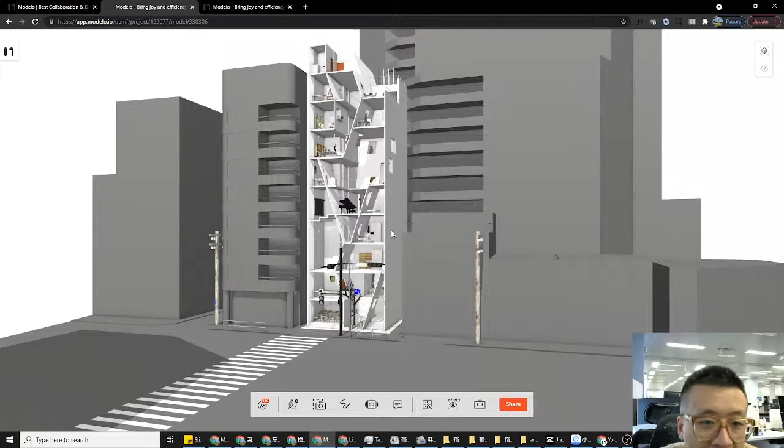I'm pretty excited that after a long period of integration with the current parent company of Modelo, that we can start to ship new features, and especially features requested by our users and clients, and it's very exciting. And I think today we're gonna go through a couple new features.

One of them is the first person roaming, or say the walk mode, that we recently introduced upon the walkthrough feature that we had before. Secondly, I'm gonna explain a little bit about the restructure of the previous comment feature, now called 3D note, and the new feature next to it, which is now called comment, and they are aimed for very different purposes for your practice workflow.

I don't know if you're a new Modelo user or you have used Modelo before, but Modelo's website is modelo.io, so you can just type in the address and click on login or sign up, and then you should be able to see an interface like this, where you house all of your projects and upload models.

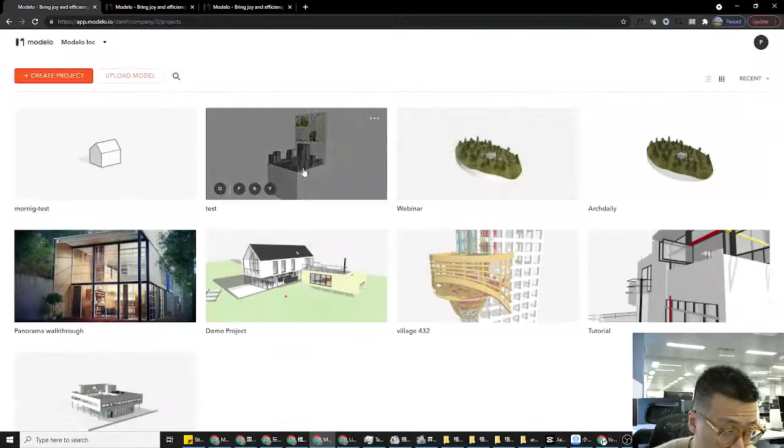We actually made some adjustments and optimizations here that allow you to directly upload a model on this page to one of your projects. Today we have a specific project called webinar here. If we go in, I can see 3 models are here that we have uploaded previously.

We're gonna go with this model right here, and let's check it out. Click on 3D, and now we are in what we call the 3D viewer page. It's probably one of the most popular pages of Modelo, where you can actually do lots of things. We have this toolbar right here.

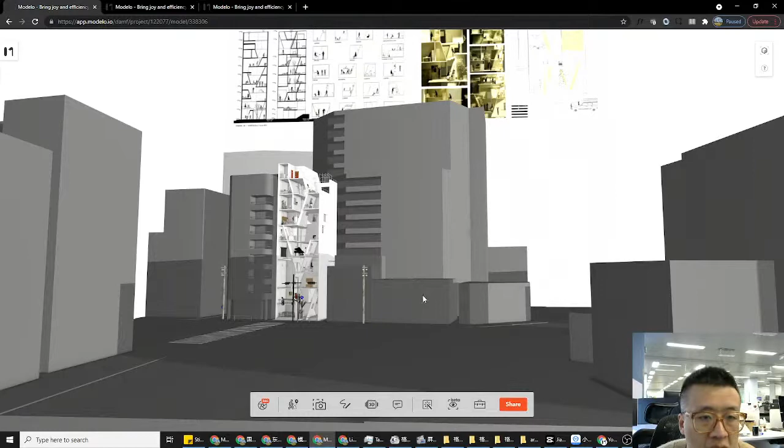The one on the left is what we call Auto 360, which means that you can actually render 3D panoramas and then automatically connect them together, so that you can turn a huge 3D model here in Modelo into a mobile-friendly 360 tour, which is very easy to share with your client and colleagues, and it's very mobile compatible, so you don't need to worry about a giant model crashing your mobile phone. So that's that. It's a pretty easy, intuitive feature.

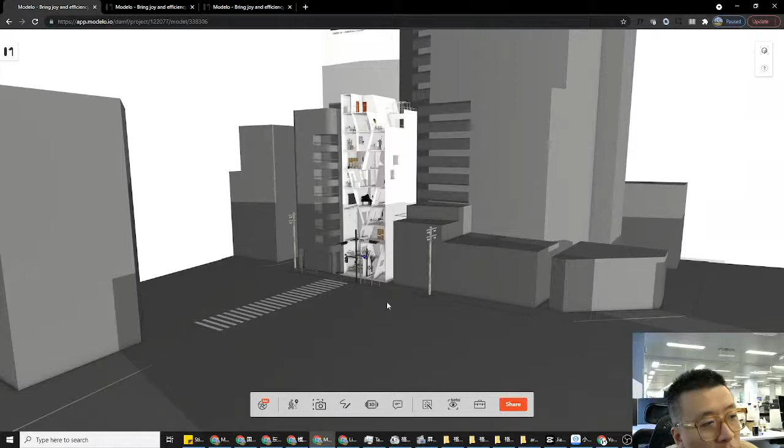Secondly is one of the features that I'm gonna introduce today, what we call first person roaming. It's somewhat similar to the experience of our walkthrough, but it's different. This time, if you click on it, your cursor turns into a people avatar, and then now you can place the avatar on any flat plane of your model.

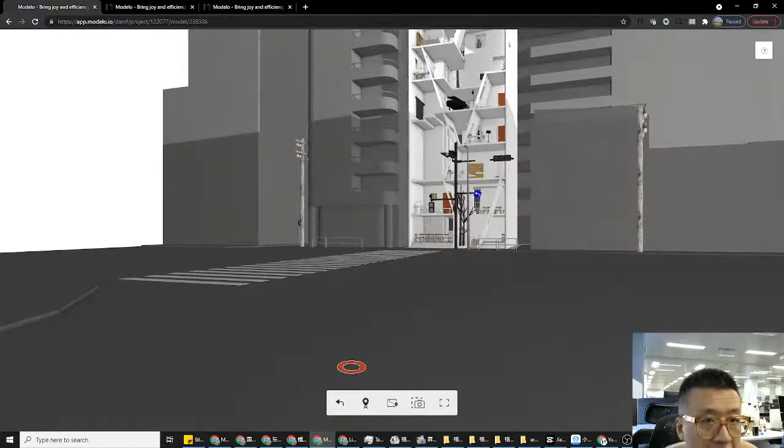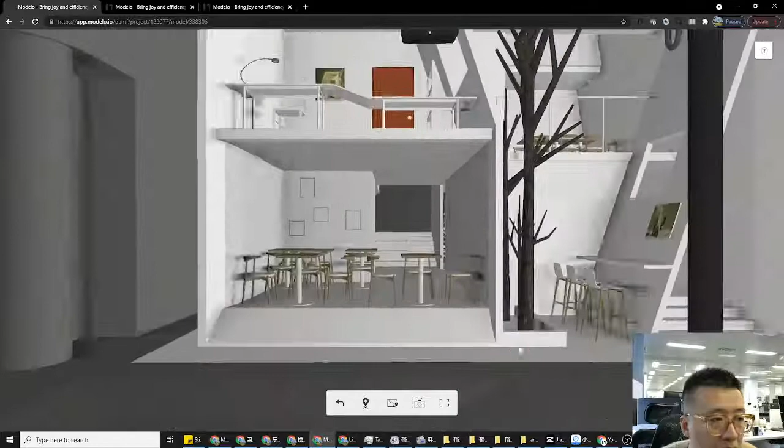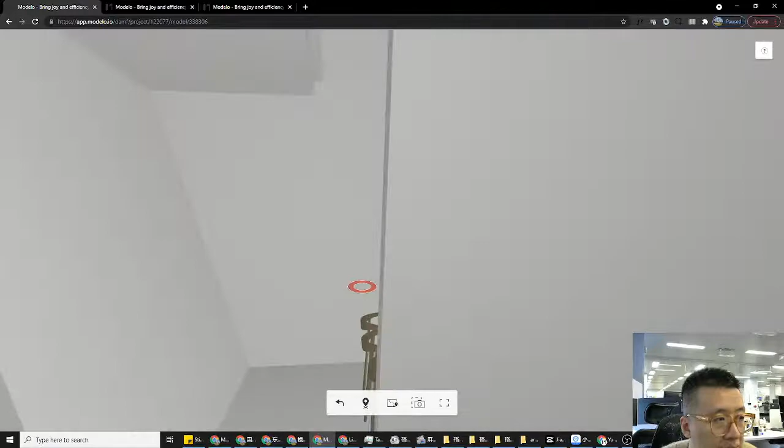If I click right here, my view actually lands where I just clicked, right? And then further on, you can use the cursor to travel through the model like this, which is pretty intuitive. You can basically just walk through your model by clicking the mouse, and you can also walk in the model so you can click on different levels. You can also climb stairs like that, and then you can just browse through the spatial design of the model.

This design right here is pretty complicated inside the circulation, right? So I just use this function to climb to this cafeteria area from the outside. Somehow I don't know how to get out of this space, but let's see. Go here, we can just click on it.

Now we are on the other side here. I think now we find the alley that leads us to the outside of the building.

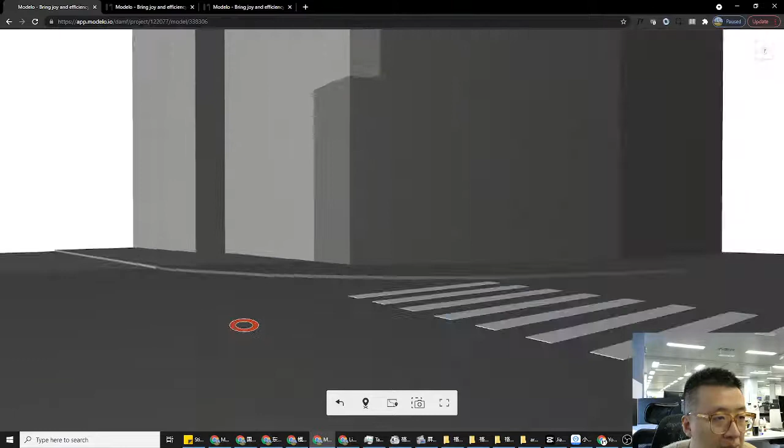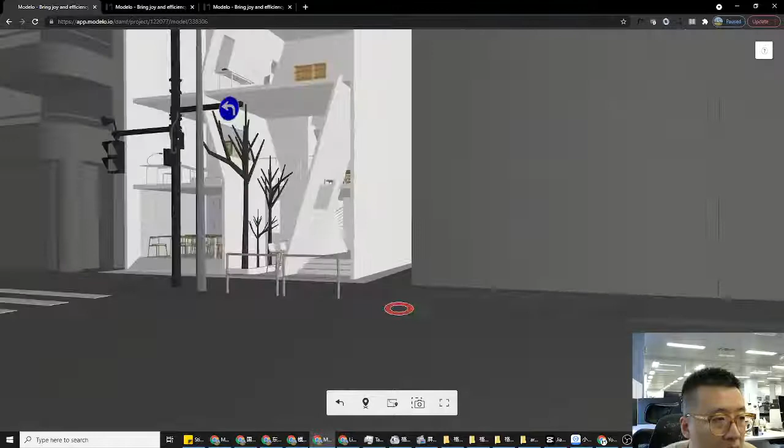This function here is very much simulating the walking experience, or teleporting experience. By clicking on different locations of the model, you will be able to walk through or teleport through the design.

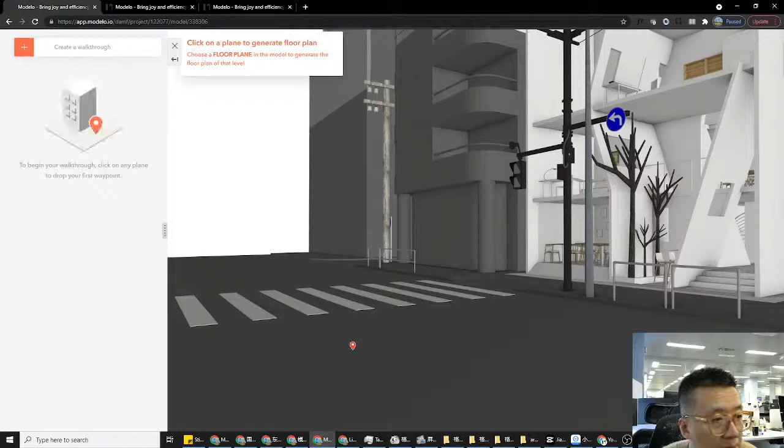On top of that, you can start or initiate a walkthrough directly in this walk mode. If you click on it, it's going to ask you to put a waypoint here, like previously, and then a second one and a third one. Then you can play it and adjust the speed, and now you have a path over there.

This path is very shareable, so you can share the model along with the path so that the viewers of your model have a more curated experience of your design. In a way, you're more in control by using this feature.

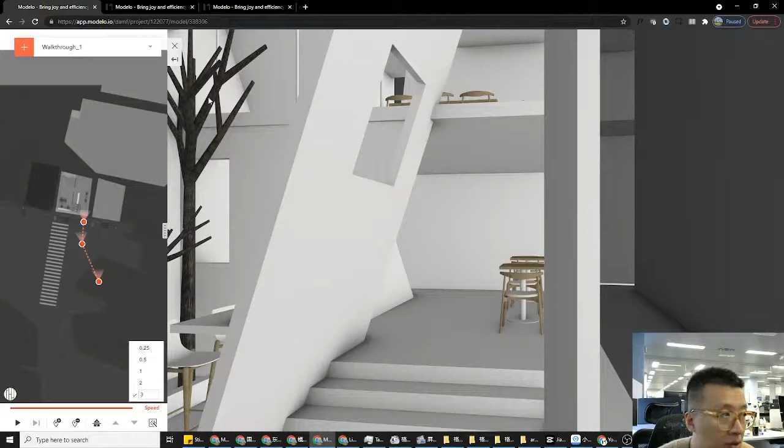But also, when you share the model, you can turn on the first-person roaming mode. Let's try this share right here. We now have this share setting function that allows you to manipulate different configurations of your share link.

For example, you can choose to show the walk mode, that's the one I just showed, or you can also show the walkthrough, not the walk mode.

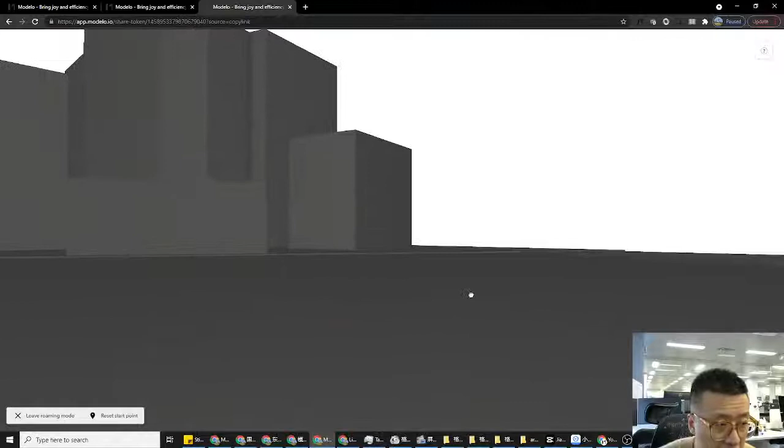We can see I have one of the share links opened here, and you can see that if I turn on the walk mode, the viewers or your clients will be able to walk through the design like that, teleporting through the design.

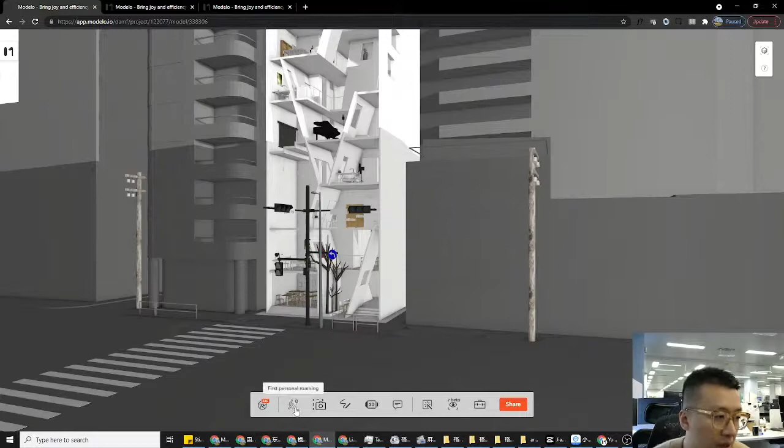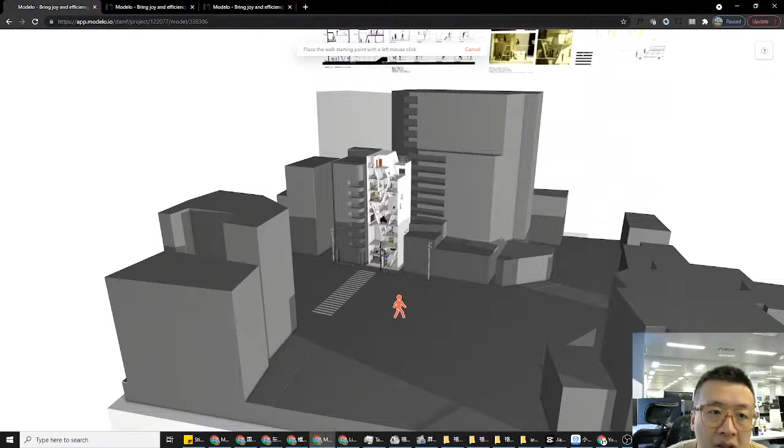That's one of the features which is pretty new, and I think we have learned from many other great softwares, especially the currently very popular VR capture software. They have this feature, and we think that for all 3D creators, like architects and designers, this feature really helps us better understand our design, as well as help others better understand the spatial quality of our design.

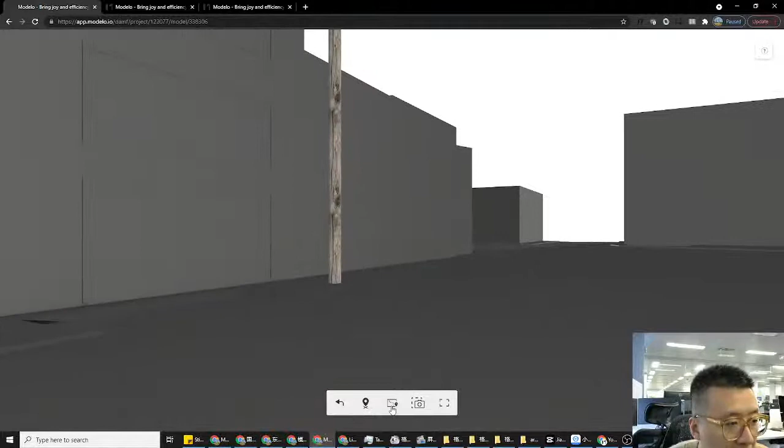So that's that. The first feature here you can just call walk mode — you can walk through the design like that. On top of that, you can create a curated path for your viewers to view, which is more controllable. That's the first feature I'm introducing today.

The second one is very exciting. Modelo was founded because we want to introduce a new way for 3D designers, architects, and engineers to better collaborate around 3D models.

I think we have done a pretty good job converting giant 3D models, Revit models, SketchUp models into a web link. On top of that, we created this very popular function, which was previously called comments.

Now it's called 3D slides, and it was designed for collaboration. But later on, we found that many people use it for presentation purposes, and now we rethink about it.

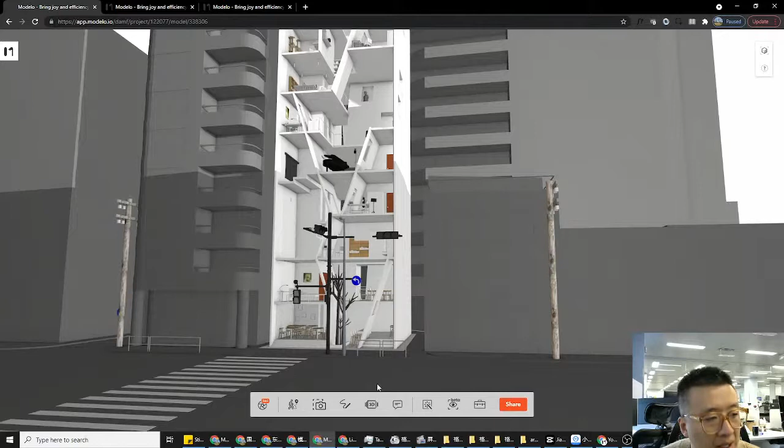We talked with lots of our users and clients, and found that they really have two different purposes when dealing with these 3D views or 3D annotations. So instead of one commenting feature that's actually most of the time used for presentation purposes, we divided it into two features right here.

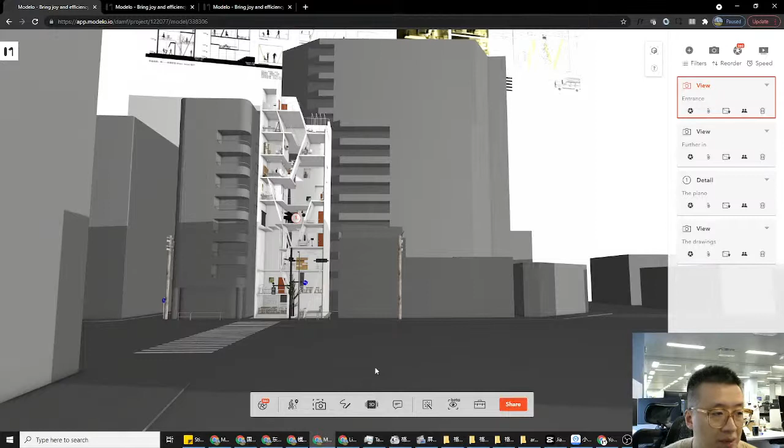The one which was previously called comments is now called 3D slides. By looking at the name, it is very much specifically only for presentation purposes.

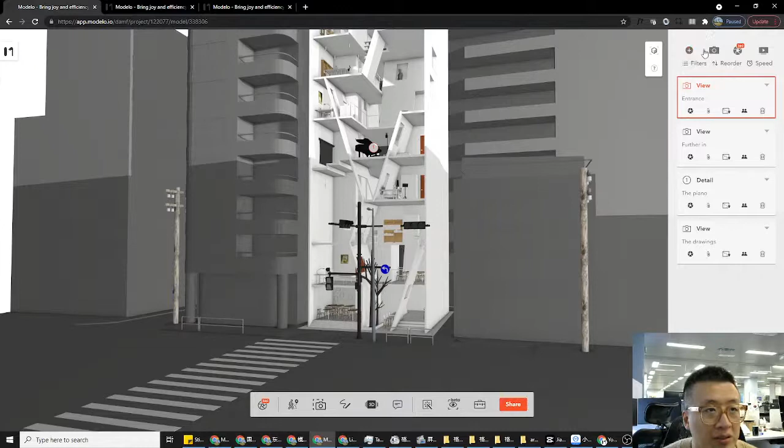The way you use it, you basically can add slides or add an annotation. If you're a SketchUp user or a Rhino user, you know you can add views over there — it's very much like that. You basically just add a view, add the slide, type in the text, give it a title, and then save it. Once you save it, it actually saves the camera location.

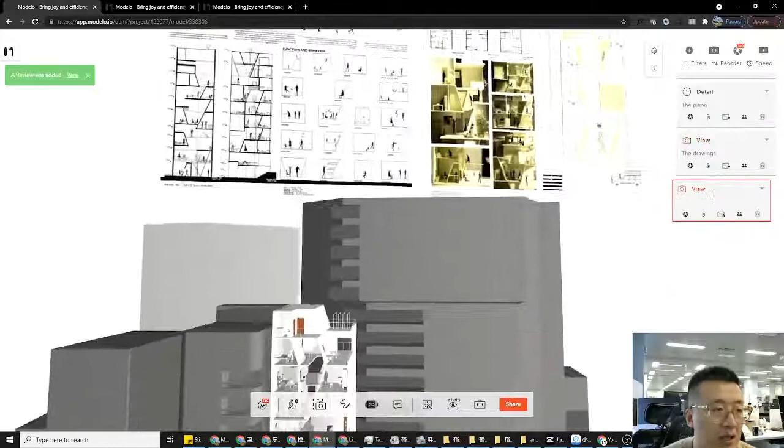You also save the current rendering settings. You can attach walkthroughs on it. You can attach attachments, images, and videos and stuff like that.

And then you can also turn it on and off for client ready, so that you will be in control when you share the design to your clients. You can only let your client see it from the very specific comment, right?

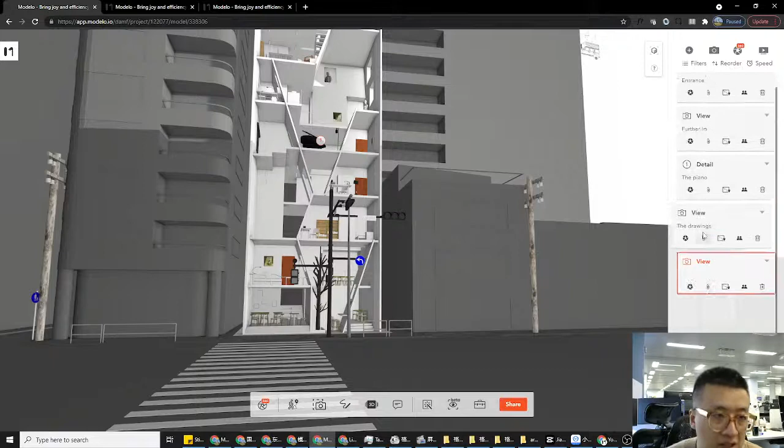The slide—I'm sorry, now it's called slide—and now we have four of them right here. And then you can do a presentation with this. So turn into presentation mode, it looks something like this.

So for our Modelo users, I think you're pretty familiar with this concept, and the only difference here is right now it's called 3D slides instead of comments. So that's for 3D slides, and now we have the very new feature, which we call comments.

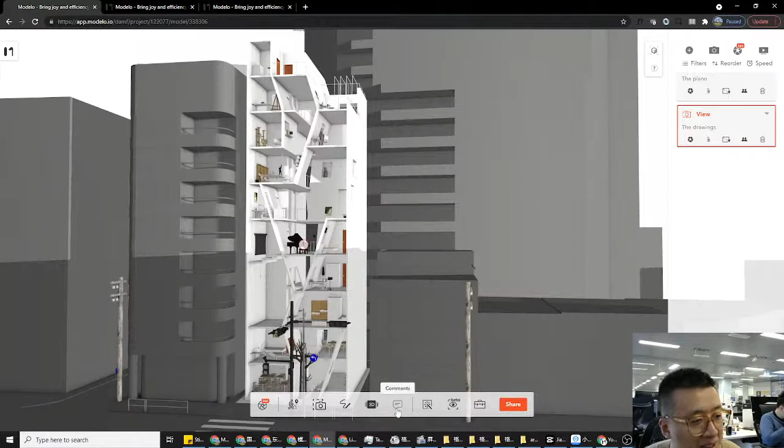The reason we thought about it for quite some time is because previously the 3D slides were called comments, and now we have the comments right here, which is only for collaboration purposes, only for commenting on the model. We also separated the markup functions and all the chat functions here as well.

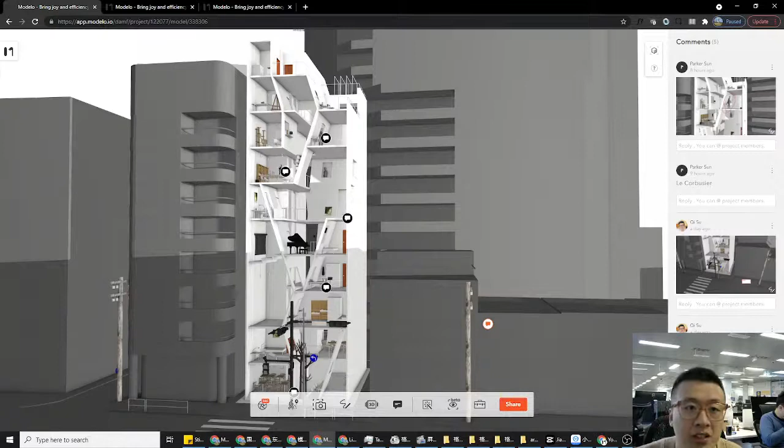So now with this new comments feature, it's actually synchronizing in real time. So if you or some other viewers are seeing the same model, when you make comments, the other viewers can actually see it in real time.

So now let's see, let me just make a comment right here. I can just click on the model and then type something in. Check out this piano right here. Piano. And then what I can also do is actually mark up on top of it.

And once I save, you actually save the markup along with the attachment of these comments here. And then once I send, you can notice right here—I'm using Parker's account right here—you can actually see that the comment is saved on the right side of the interface, and then you can also click through.

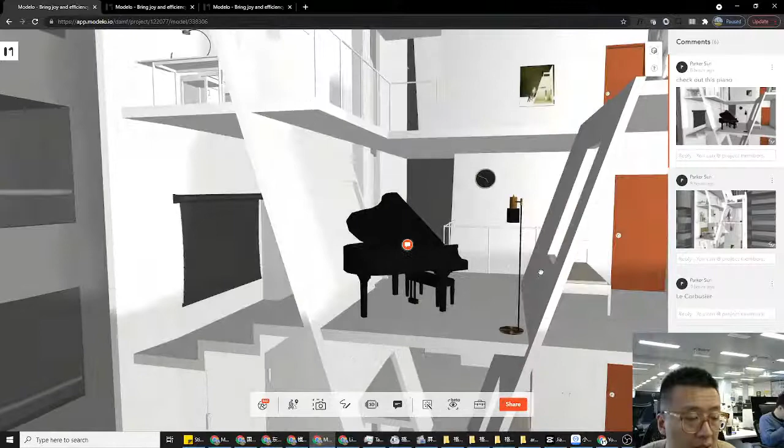The different comments that have been made in this viewer, and the animation or simulation is very much like the 3D slides, which means that whenever you make a 3D comment, it remembers the location where you made it, and then once the viewers click on a specific comment, it goes directly to that specific time or space where the creator made the comment.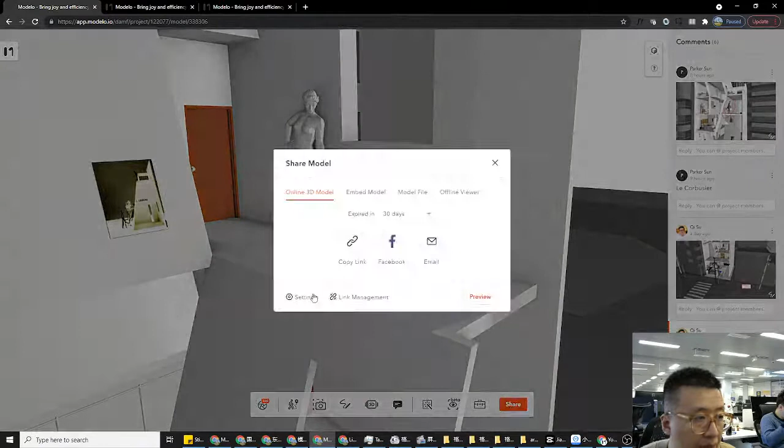And what's cool about this feature is that you can actually share the model with the comment feature. So now if we go to share right here and click on the setting, you can actually see that on the third option from the top, it says show comments, which is automatically on once you have your model uploaded here.

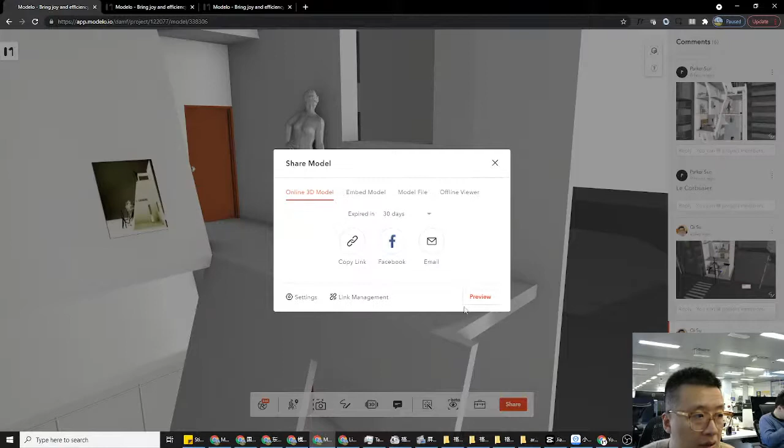And then once you have it turned on, if you go to the share link—I think I have it open here, right here—the share link that I already have open, you can turn on the comments, and you can actually see this one: check out the piano, this comment I just made in the Modelo viewer that popped up in this share link.

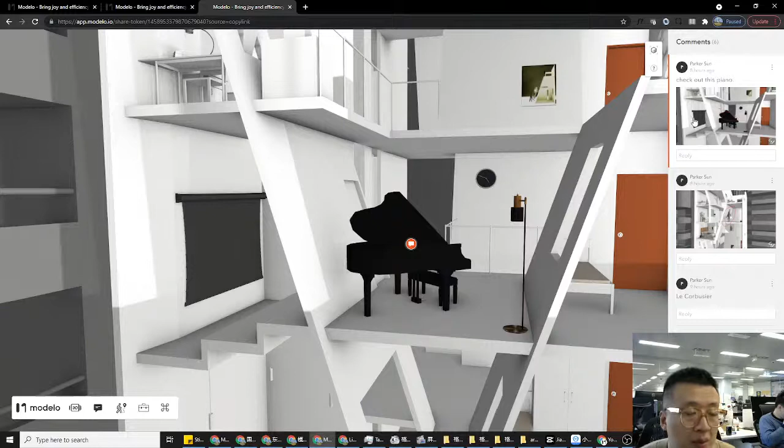And you can also do this for your, say, if you share the link to your client and they got the link, they see all the comments, and if they want to make a comment by themselves, they can actually do something here.

Hello, you can just type in the comment here, simulating that I'm the client, and then once I have a new comment here, I can see it here in this share link.

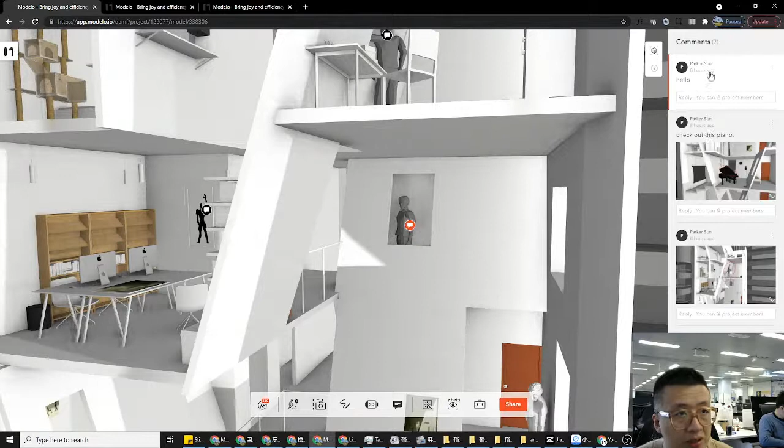If I go back to the Modelo interface, you can actually see this one, the one comment that I just made through the share link, popped up here. And what I'm going to do is actually share this link to you guys through the chat here.

Let me see if I can actually... oh, right here. Let me know if you can actually see it. I just pasted it in the chat panel here, and then you can actually click on it and try to make a comment and interact with me through this link over there.

You will need to log in before making any comments, because we have to know who made these comments, and the 3D designer or model uploader needs to know who made which comment.

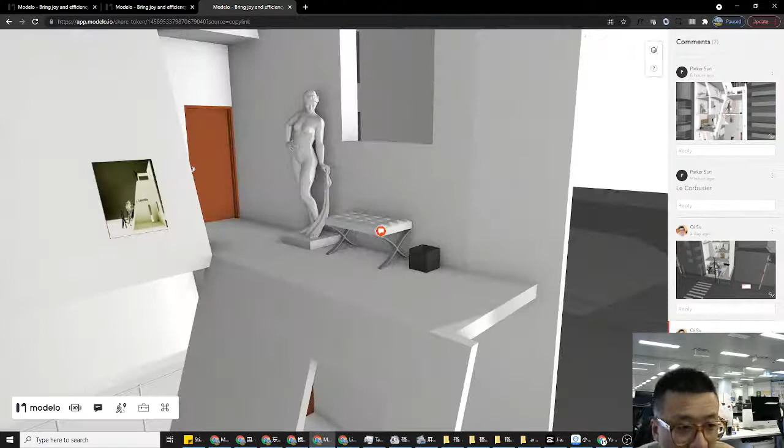You can try that out by clicking on that link and make comments to interact with me. This feature is very new to our entire function, allowing you to interact, collaborate, and communicate with your client or colleagues right away. It happens through two interfaces.

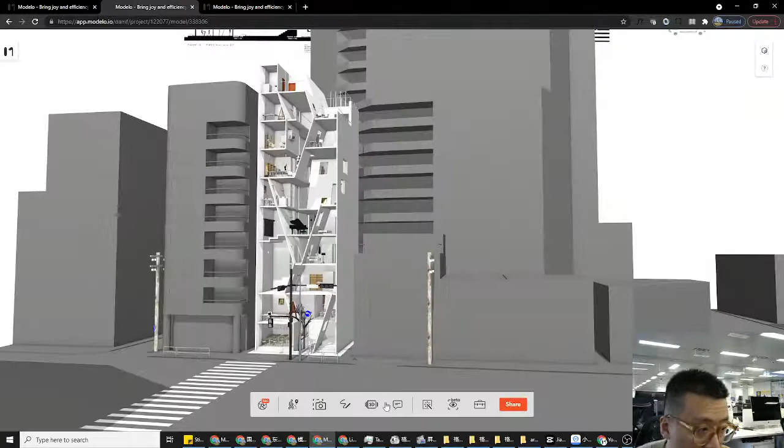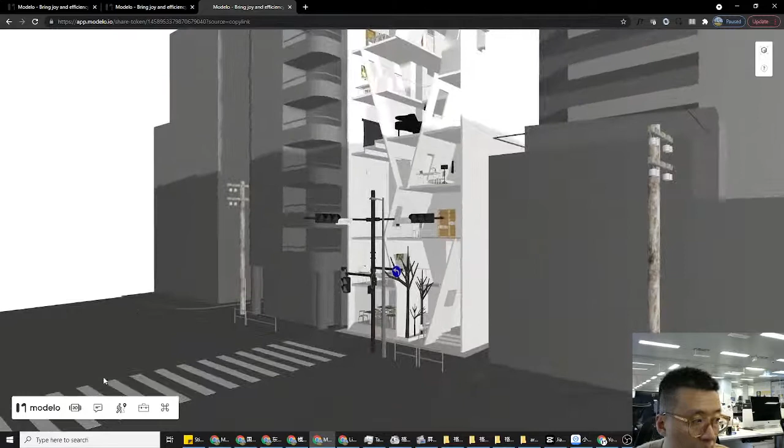You can make comments directly in the Modelo model viewer, which has the toolbar at the bottom. Once you share the link of this model, the viewer's share link interface is different, where the toolbars reside only at the bottom left.

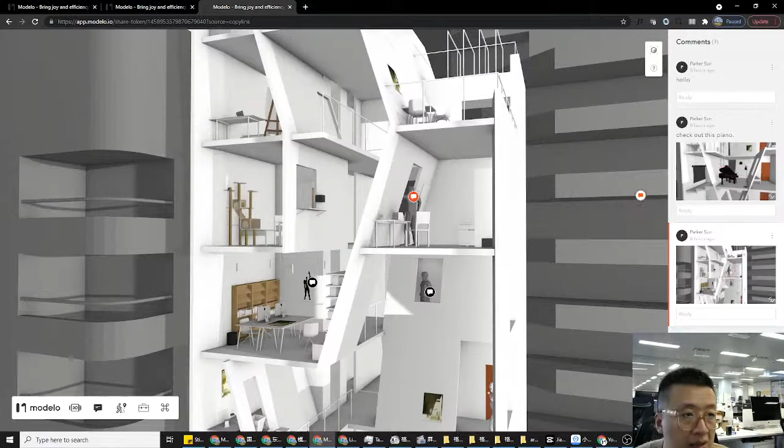This is the share link, and people who got the share link will be able to log in and make comments here as well, so you can communicate. Let's make another one - we can say, 'what a nice rendering.'

Once I send it, if I go back to the Modelo viewer and toggle it on and off, you can see the comment I made through the share link popped up right here. What you can also do is reply, agree, and now you can see there's one reply.

If we go to this link, turn it on and off, you can see the reply here, and you can start replying from here as well. Let's say we move this building to this side, save it, and now you can start communicating with each other.

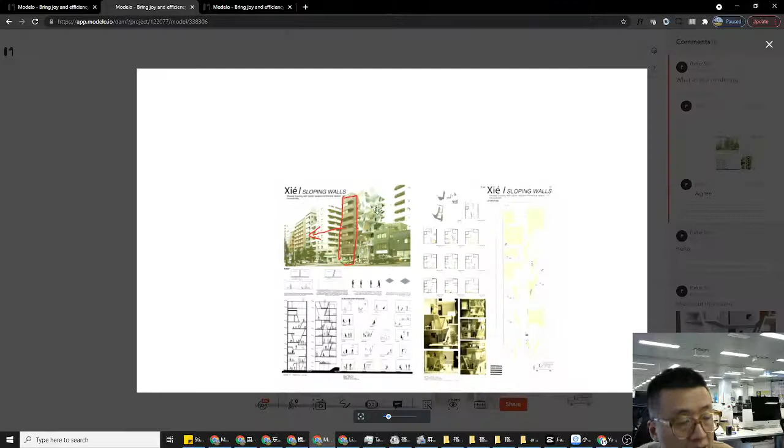I made a reply here around this commenting thread. If I go back to the Modelo viewer, you'll be able to see that sketch I just made. You can click on it to zoom in and further reply, or tag your team members so they can know what's going on.

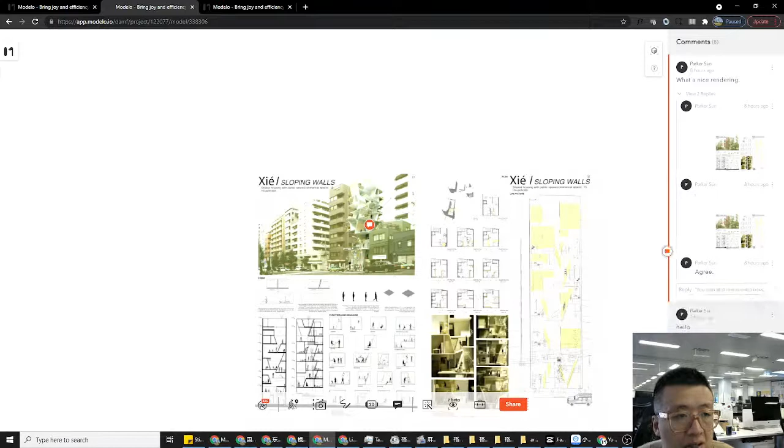You can also attach images as attachments for references, and once you send, people will be able to see it here. Just toggle it on and off - you'll see there are 3 replies here.

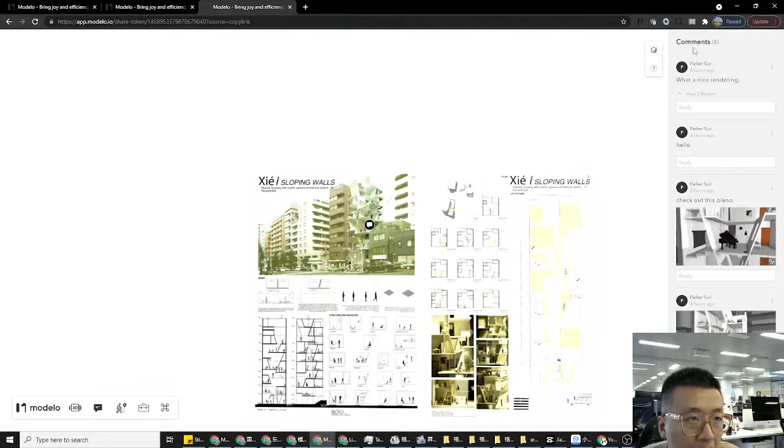Right now, to refresh the comments, you still need to turn it on and off. But I think later this month all these features are going to be in real time, so you won't need to refresh. All the new comments will pop up in real time, so you can host even a live webinar within Modelo.

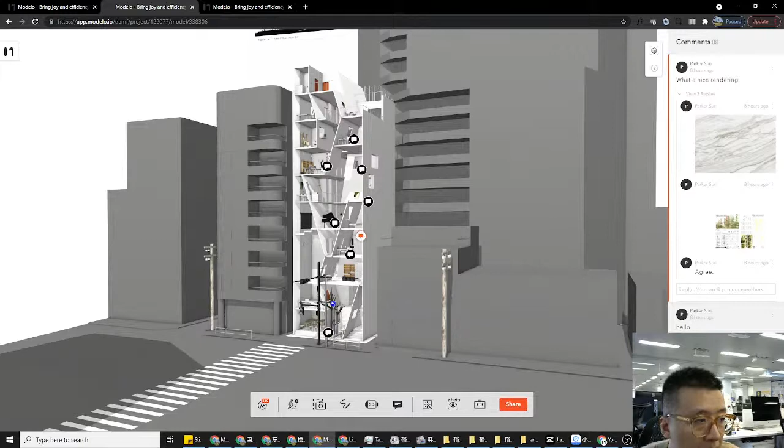When you hover on any of these comments, you'll be able to see the content, the text, as well as the sketch markups. Then you can click on it, and it goes directly to the view where the comment was made. You can also click here to see the markup associated with the comment.

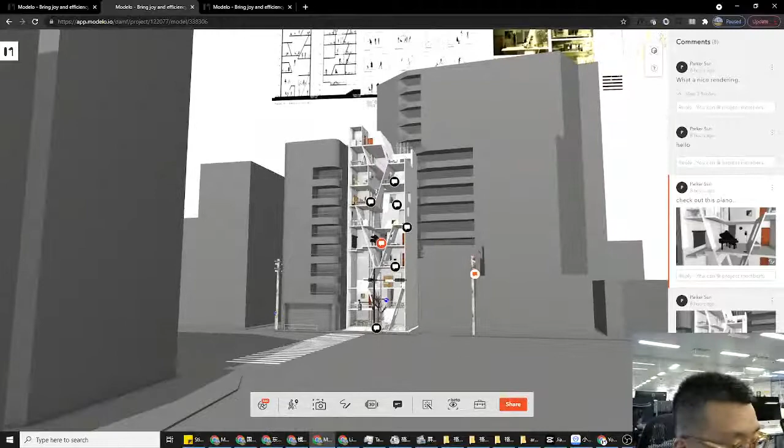That's the very new feature of Modelo, and we've found that many users use this feature to do remote collaboration around their 3D models. I hope you guys found it useful, and let me know if you have any feedback around this feature.

So that would be the introduction of these new features around the redesign of the 3D slides and the new comment feature. Furthermore, today I'm going to show a little bit about another new feature we have here, which is what we call KooRender.

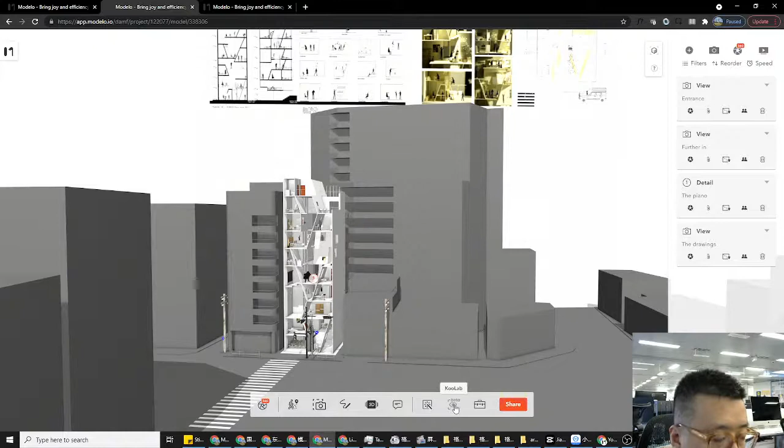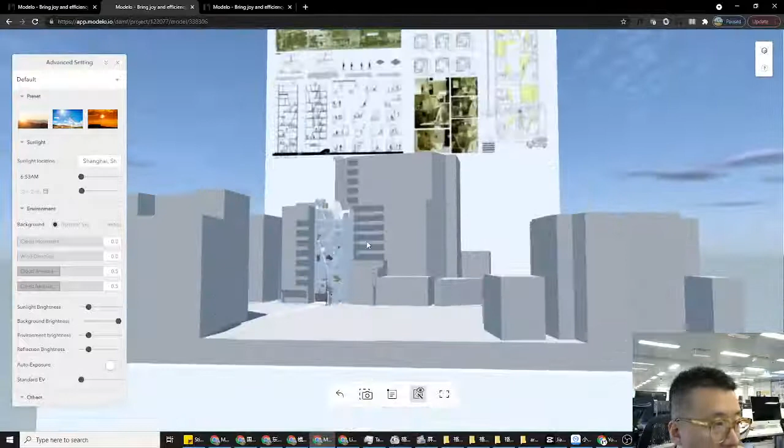Previously called KooRender, right now it's called KooLab, which is a new rendering mode of the model. Once you toggle it on, you can actually see it like this. It comes with a very nice rendering mode with the dynamic sky as well as the base. And what's cool about it is it actually comes with a dynamic sky here.

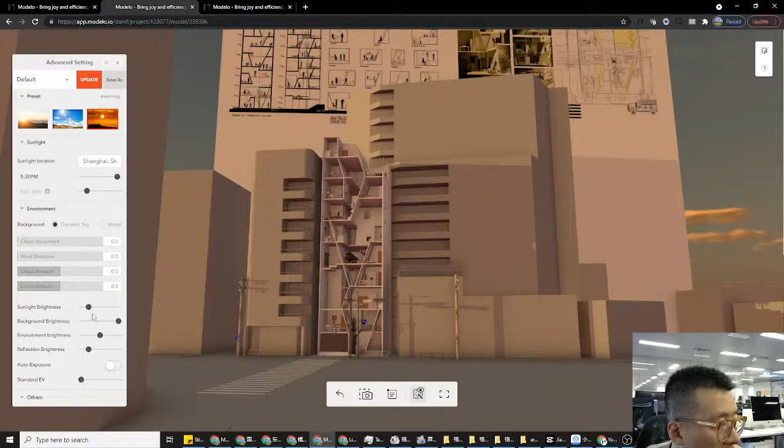You can actually simulate the cloud right here, and then change the cloud, make it stop, and then also choose the time of day here, and then you can actually simulate the morning atmosphere or the evening atmosphere of the model, and create a very quick rendering of this model. There are lots of adjustments you can do: brightness, background brightness, environment brightness, and reflection.

We have seen users make very great renderings out of it. So I'm very eager to actually see what our users can do with this new feature right here. I think for this new feature, we're gonna start a separate live event only introducing this.

Later on, this one I see a comment right here. But later on, we're also gonna introduce a new feature that allows you to export a video or a GIF directly from here as well. So that's a very brief introduction about this CoolLab feature right here.

And I see that people have a comment. Heather has a comment here: hello, if we share the link with some customers.

That's a great feedback, actually. We were waiting on that, we thought about it. Since you've mentioned it, I think we're gonna start shipping this feature that Heather just mentioned in the comment panel. We thought about it, and we thought the first version was better coming with this specific avatar and then the name, so that everybody knows what's going on with their share link.

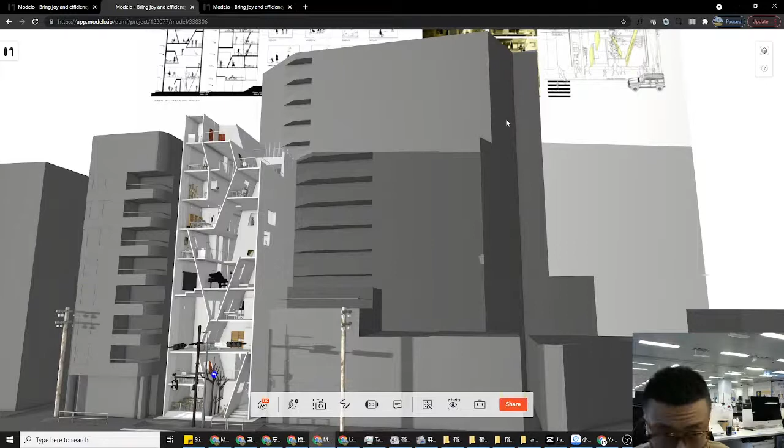But of course, I think we can introduce this one, the anonymous login, and then people can actually comment without having to log in or sign up, right? So which is in a way a little bit inconvenient, but for now, I think that's the way it works, and we're gonna make the adjustment upon your feedback. Thanks, let me know if you have any other feedback or questions.

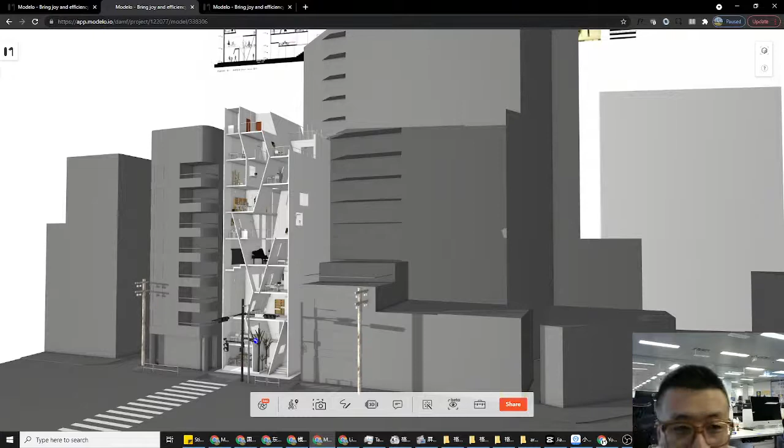Wow, I can see this guy. Can you see me? Yes, I can. Okay, we can actually see there's this guy, Wang Junren, who actually replies and made a comment here.